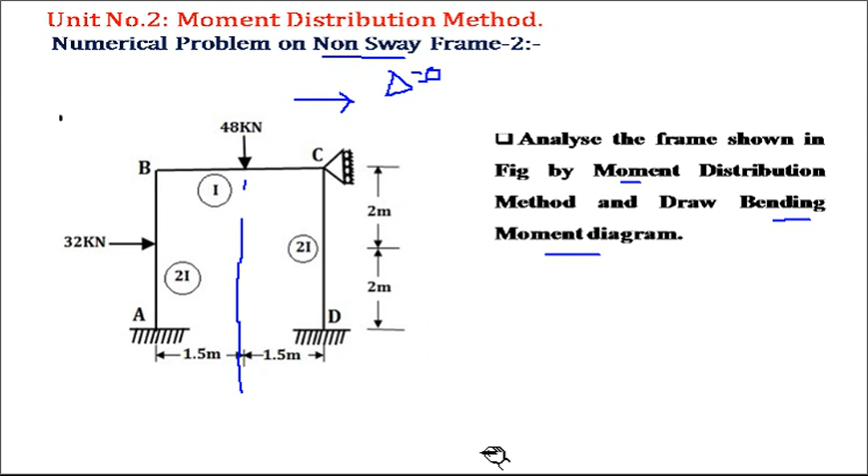Now the first step, as we know, is to find out the fixed moment, with the sign convention anti-clockwise positive, clockwise negative. When we are analyzing the frame, we are standing inside the frame. So the fixed moment in member AB due to the point load 32 kN will be in anti-clockwise direction. As the point load is acting at the center, the formula for fixed moment is WL by 8.

So value of W is 32. The length of member is 4. So 32 into 4 divided by 8. The fixed moment in member AB is 16. Now in member BA, the fixed moment will act in clockwise direction. As it is acting in clockwise direction, the value is minus.

The formula for fixed moment when the point load is acting at center is WL by 8. So value of W is 32, length of member 4, minus 32 into 4 by 8, the value is minus 16 kilonewton meter. Now, fixed moment for member BC will act in anti-clockwise direction.

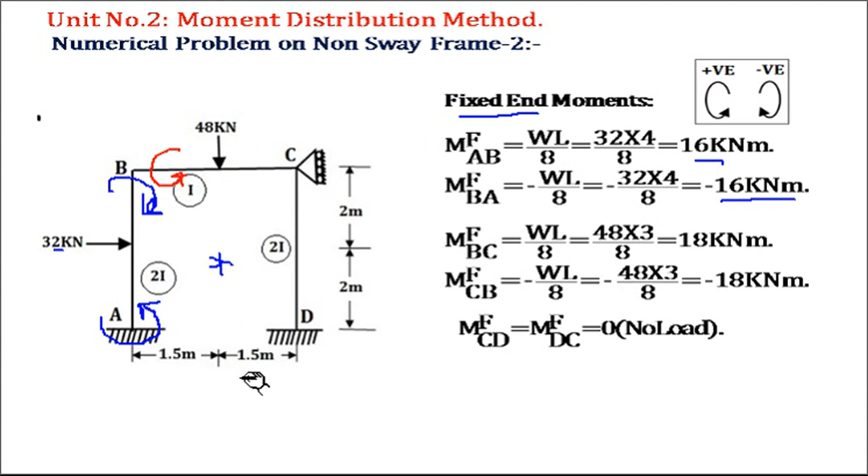As it is acting in anti-clockwise direction, so plus, we know the formula, WL by 8. So 48 into the length 3 divided by 8. So the value is 18 kilonewton meter. That is, fixed moment in member BC is 18 kilonewton meter.

Now fixed moment in member CB will act in clockwise direction. So as it is acting in clockwise direction, minus WL upon 8, value of W is 48, length of member is 3. So minus 48 into 3 divided by 8. So fixed moment in member CB is minus 18 kilonewton meter.

Now in portion CD, there is no load. As there is no load, fixed moment in member CD as well as in member DC is equal to 0. So these were the fixed moments in different members of frame ABCD.

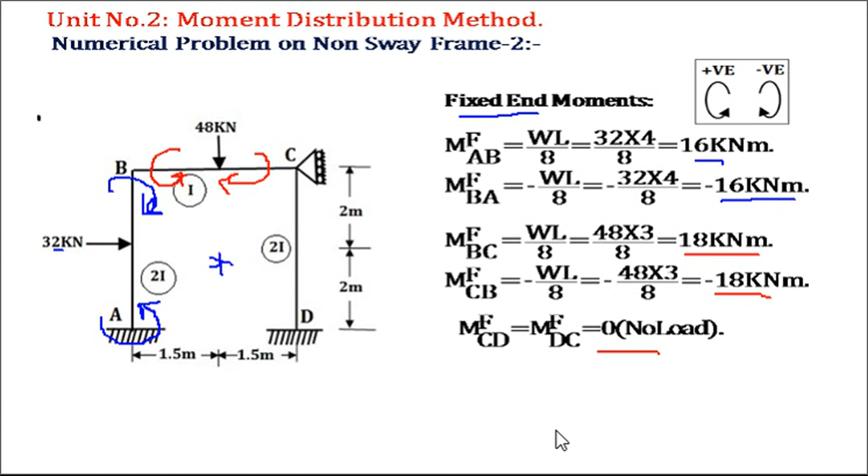The next step is to find out the distribution factor. Here two joints are there, one is B, another is C. At joint B, two members are connecting, one is BA and second one is BC. At joint C, again two members are connecting, one is CB and second one is CD. Now we'll find out the relative stiffness for member BA.

For member BA, from B to A, if you observe, the far end is fixed. When the far end is fixed, the value of relative stiffness is I by L. So value of I for member AB is 2I, length of member is 4. So 2I by 4, the relative stiffness for member BA is 0.5I.

Now from B to C, if you observe here, we are standing inside the frame. Okay, from B, the far end is simple and the beam is continuous here.

So the frame is continuous. Okay, so far end is simple and beam is continuous. So here the relative stiffness value is I upon L. Okay, the length of member is 3. So I divided by 3. So the value of relative stiffness for member BC is 0.34 I.

Okay. Now total relative stiffness at joint B will be the addition of relative stiffness of member BA and member BC. So relative stiffness of member BA is 0.5 I and relative stiffness of member BC is 0.34 I. So the addition of these two is 0.84 I.

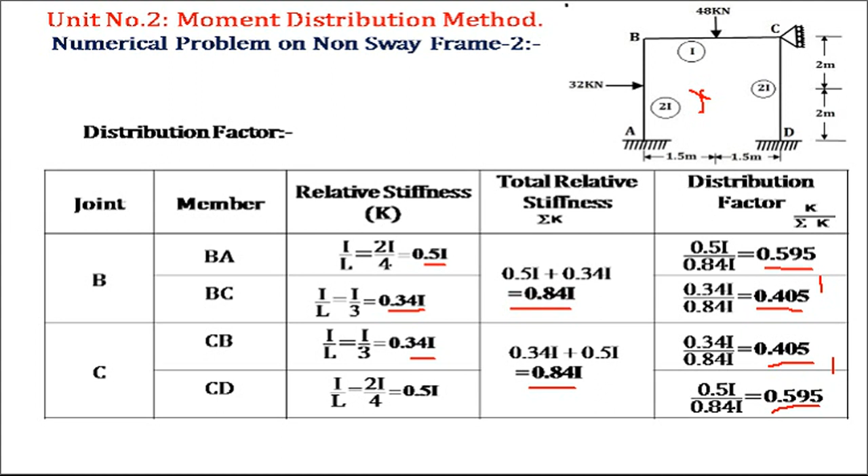Next we have to find out the final moment in different members of a frame. So the first row is the member. So members of the frame are AB, BA, BC, CB, CD and DC. Distribution factor at joint B already we have calculated. Okay, so 0.595 at BA, 0.405 at BC, then 0.405 at CB and 0.595 at CD.

Fixed moment 16 at AB, minus 16 at BA, 18 at BC, minus 18 at CB, 0 at CD and 0 at DC. So initial moment, here the balance. So as no balance is there or no correction is there, here it is 0. So initial moment will be same as that of the fixed moment.

Now the summation of moment at B is equal to 0. That means moment in member BA plus moment in member BC should be equal to 0. But if you take the difference, that difference is equal to plus 2. So this plus 2 we have to distribute in members BA and BC. As the difference is plus 2, the correcting moment will be minus 2, and this minus 2 is to be distributed in members BA and BC in proportion of the distribution factor.

So the component of correcting moment for member CB will be plus 0.017 into 0.405, so we get the value as 0.007. The component of the correcting moment for member CD will be plus 0.017 into 0.595, so that value is 0.010. Half is transferred to the member DC from CD, and from CB it will be transferred to the member BC. Okay. Now again, the moment at joint B is plus 0.003.

Now the component of the correcting moment will be minus 0.003. So the component of the correcting moment in member BA will be minus 0.003 multiplied by 0.595, so that value is minus 0.002. Now the correcting moment in member BC will be minus 0.003 multiplied by 0.405, so that value is minus 0.001.

Now at joint C, the moment is minus 0.030, so the correcting moment will be plus 0.030. So plus 0.030 multiplied by the distribution factor 0.405, here we get value 0.012. The component of correcting moment for member CD is plus 0.030 into 0.595, so that value is 0.018.

Now always remember that you have to stop the distribution when the value after the decimal is 0 in each member. Here we observe it is 0.00 at every member. So now we have to do the addition from the initial moment; whatever values are there, you have to add. So 16 minus all these values: the final moment in member AB is 14.253.

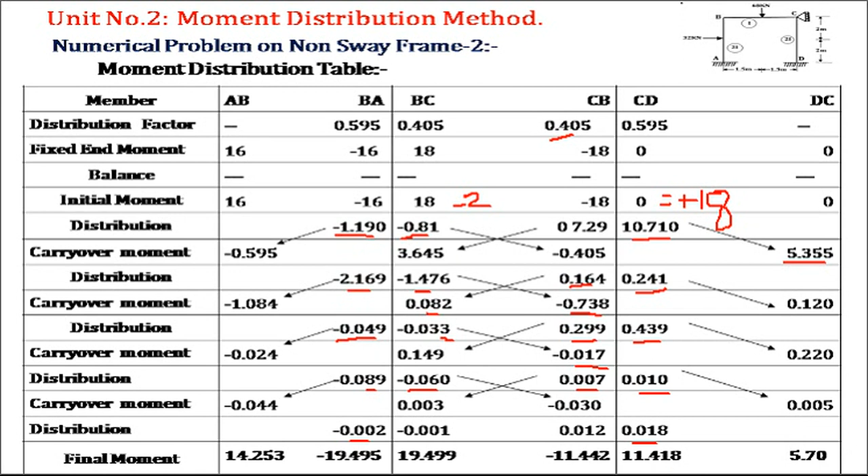Next step, you have to draw the bending moment diagram. The moment in member AB is plus, meaning anti-clockwise. That means you rotate joint A in the anti-clockwise direction and cut the member once. So this value, 14.253, will be on the left hand side of A. Now at joint B the moment is minus, meaning you rotate the joint in the clockwise direction, so the value will be on the left hand side of B. Here you show 19.5, and join this by a straight line.

Now in member BC the moment is plus, meaning anti-clockwise. You rotate joint B in the anti-clockwise direction and it should cut the member BC once, so 19.5 is above the horizontal line. Now in member CB the value is minus 11.442. That means you rotate joint C in the clockwise direction and it should cut the member once, so it is above: 11.42.

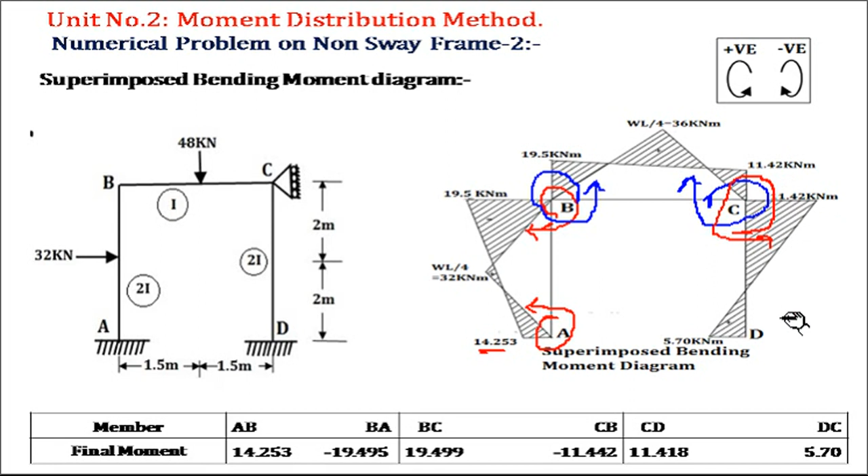Next, the moment in member CD is 11.418, in the anti-clockwise direction. That means you rotate joint C in the anti-clockwise direction and it should cut the member CD once, so this value will be on the right hand side of point C. Then the moment in member DC is plus 5.7, meaning you rotate joint D in the anti-clockwise direction, so the value will be on the left hand side and you join this line. So these were the fixed values.

Now you have to draw the free bending moment diagram. In portion AB there is a point load of 32 kilonewton, so the free bending moment will be WL by 4, which is 32 kilonewton meter; join by straight lines. In portion BC again a point load acts at the center. The formula is WL by 4, giving 36 kilonewton meter; join by straight lines. Here we superimpose the free bending moment diagram and the fixed bending moment diagram, so this diagram is the superimposed bending moment diagram.